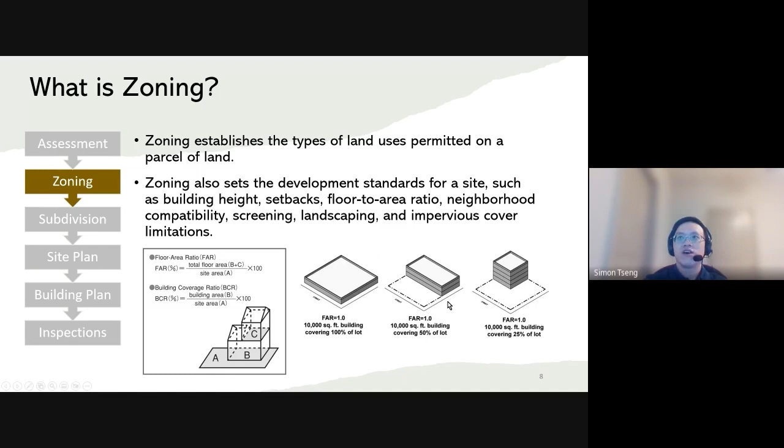So in general, what does zoning do to the city? If you ask a group of people to build something in the same zoning district, you can imagine that they probably will build buildings all in similar shape and similar height, because there are limits there, and all of them want to reach the limits. So everything will look similar. Zoning is a kind of convenient tool for urban planning and design.

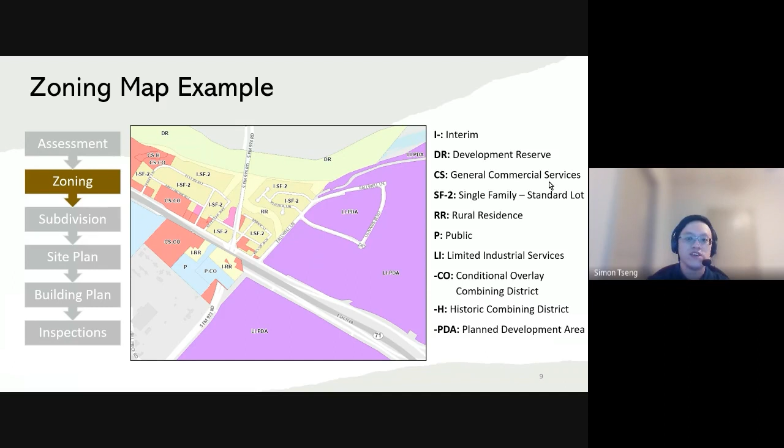So who will get involved if the developer wants to do a zoning or rezoning? Usually the land use commission - they will review your case and tell you if it's okay to revise the current zoning, or if it's okay to add another zoning to the existing one. The developer's team usually includes an urban planner, architect. Sometimes the developer is the city of Austin itself.

And what's the civil engineer's job here? Actually, not much can be done, because this is a high-level thing. Maybe you can do the traffic impact analysis, but not much can be done. And when I say civil engineer here, I mean a civil engineer in a consulting firm like myself.

What is a subdivision? It has three subparts: first is a preliminary plan, second part is plat, third one is subdivision construction plan. By definition, subdivision is the act of dividing land into pieces that are easier to develop.

Preliminary plan is a map or drawing of a plat - I'll show examples later. Here are some regulations telling you that if you want to build a subdivision, you have to follow the rules of building a road, sidewalks, utility lines, storm sewer, drainage ways. So in general, a subdivision development contains infrastructure only - most of the work is in the public right-of-way. I'll show you some examples later.

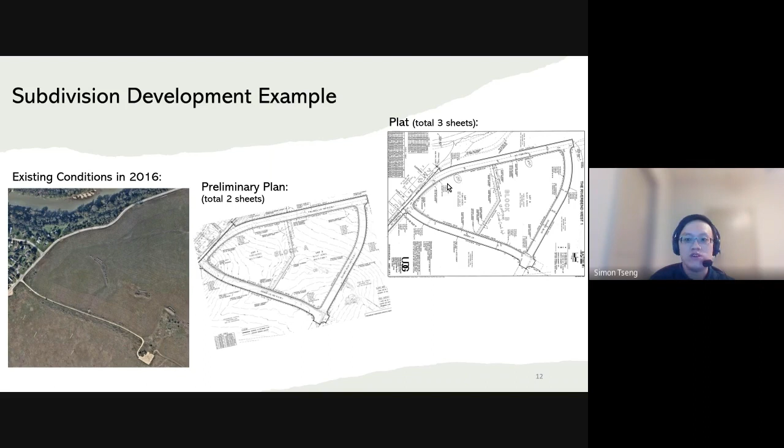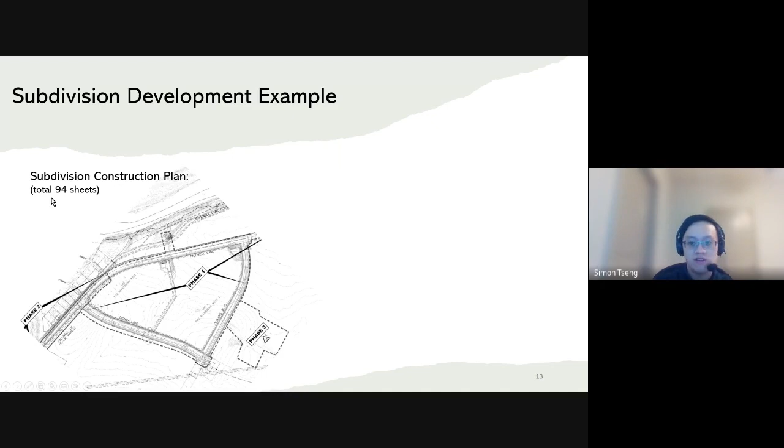In the formal plan for this area, the subdivision construction plan has a total of 94 sheets. These 94 sheets will tell you how to build all the public infrastructure in this area, such as roads, utility, and stormwater detention ponds. Here it is under construction in 2018.

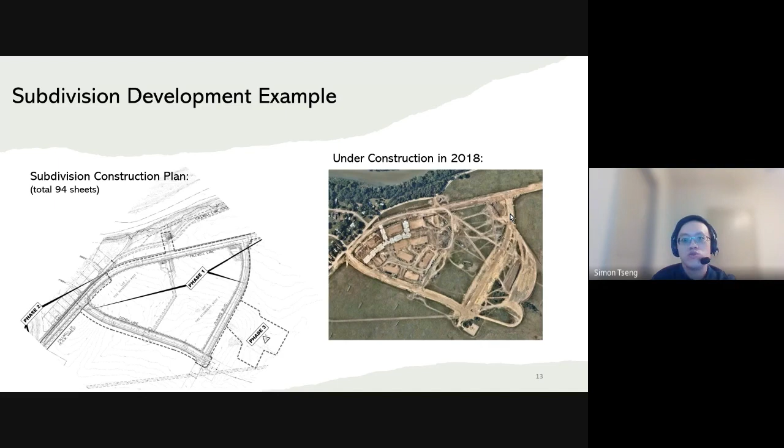Next, let's talk about who will get involved if the developer wants to do a subdivision. There will be reviewers from City of Austin Planning and Development Review, with people from all different backgrounds. Their job is to sit there waiting for your plans, put their comments on plans, and make sure you follow the rules. The developer's team will have a surveyor, urban planner, engineers, and civil engineer doing a lot of things in this stage. I put that in the next slide.

I use this as an example. First of all, if your site is near a creek, you'll have to do a flood plain analysis to make sure everything is outside the flood plain. And you have to do erosion and sedimentation control design to make sure all your construction activities will not impact the environment.

Water and wastewater utility design, and of course geotechnical analysis for all the roads. Here we have ponds, the water quality pond and detention pond design, and sometimes we'll need structural design for the pond walls. Also for the roads, you'll need grading and drainage, and sometimes you'll need sidewalks. Basically, our job is to design most of the public infrastructure for this area.

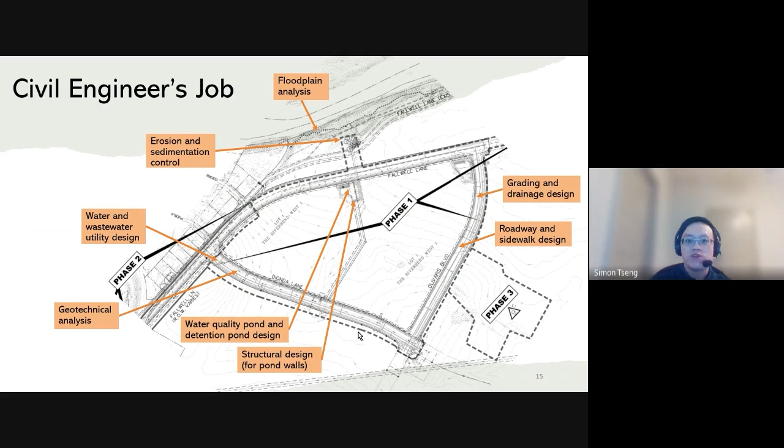Now let's move on to the site plan. This is the definition: it's a plan for a development other than a subdivision construction plan to cover everything. Most of the site plan work is inside the property lines. The work scope includes all infrastructure, but it stops at the buildings. It will only show the general location, function, and shape of buildings. The building's details will be covered by the building plan. So here it's only for the infrastructure, the site plan.

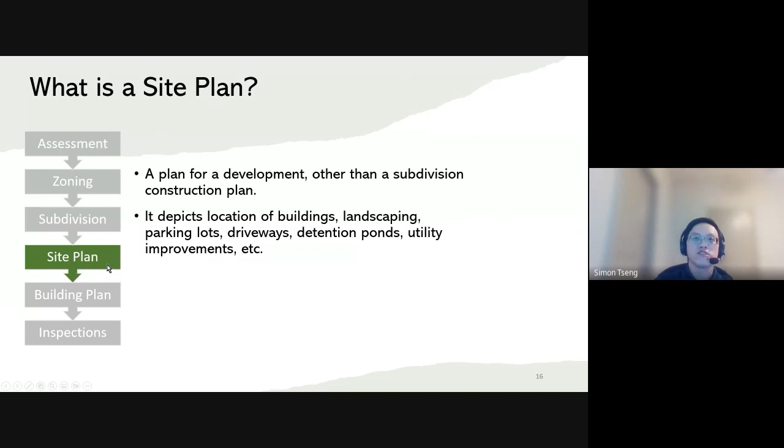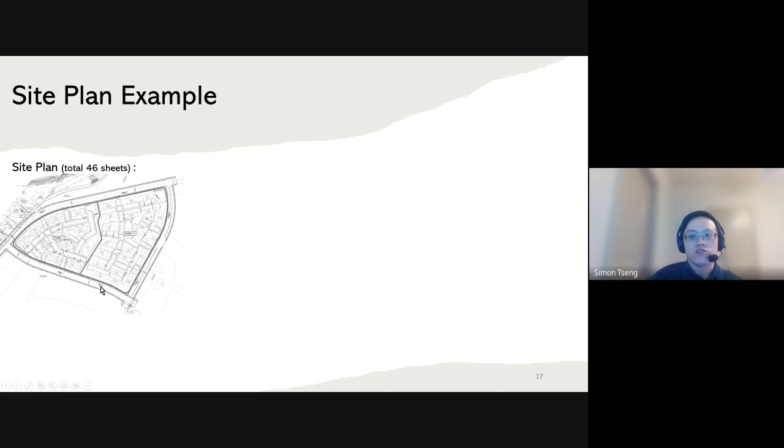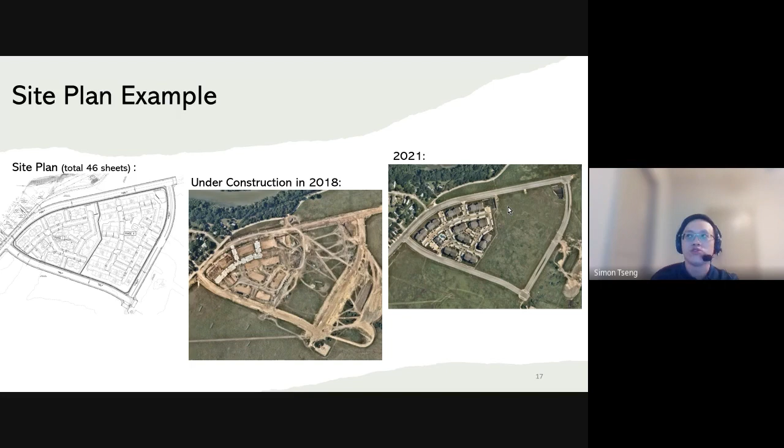So who will get involved if the developer wants to do a site plan? This is the same group of reviewers from City of Austin, but now they will focus on the gray areas between public and private properties. In the developer team, now you will see architect and landscape architect. Their job is to make sure everything is functional, beautiful, and user-friendly—unlike civil engineers like myself, who only focus on functionality.

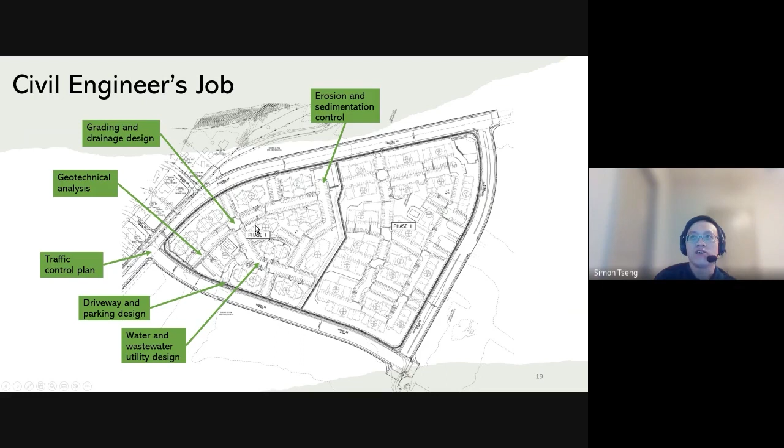The civil engineer's job is similar to subdivision, just inside the property lines. You have to do erosion and sedimentation control, grading and drainage design for the driveways and landscape areas, geotechnical analysis for buildings, and a traffic control plan to show the contractor how to handle existing traffic when construction activities start. There's also parking lot design, and water and wastewater utility design for all the apartment buildings.

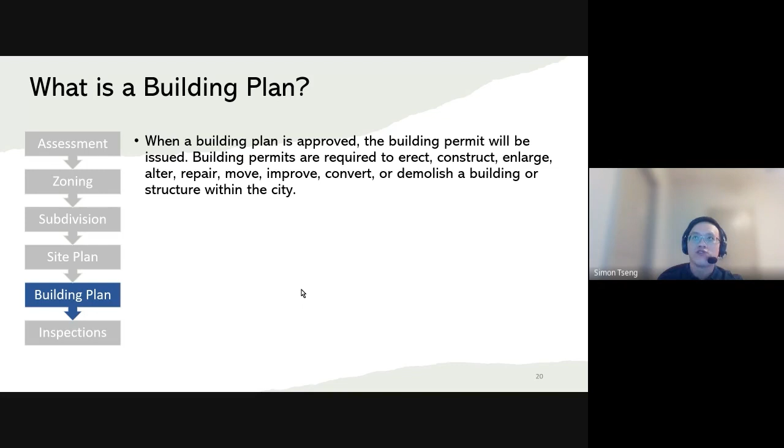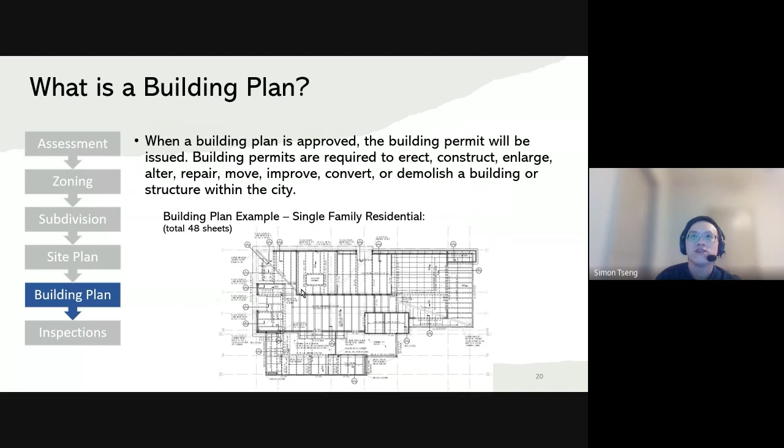Building plans are needed to get building permits. The building permits are required to erect, construct, enlarge, alter, repair, move, improve, convert, or demolish a building or structure within the city. So here's an example of a single-family residential building plan. It has 48 sheets. And who will get involved?

The reviewers are from the city. They are a different group, and they won't focus too much on the private things. They will double check if there are any gray areas between public and private.

In the developer's team, you'll see mostly it is architects and landscape architects' showtime. For civil engineering, usually only the structural engineer can play with them. A civil engineer like myself would not touch the building.

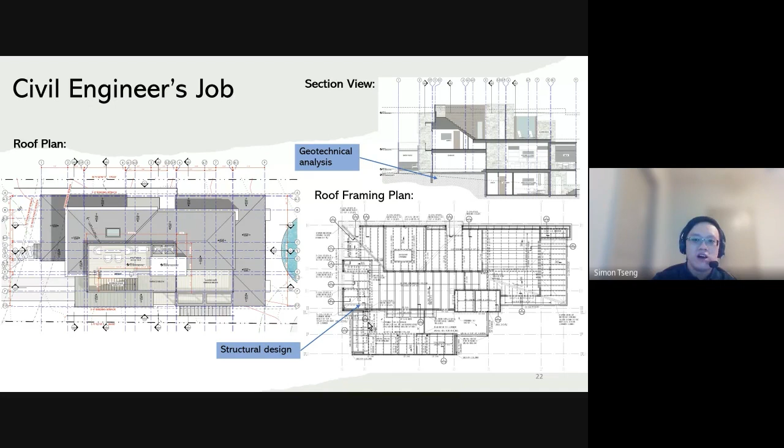In the building plan, you'll see roof plan, framing plan, section views, things like that. Civil engineers can do some geotechnical analysis, structural design, and sometimes a little drainage design for the backyard. But most of the time, a landscape architect can handle it, just a small scope of work.

So like myself, as a civil engineer in a consulting firm, we'll focus on subdivision and site plan, just these two stages. Our job is to produce a plan and get the permits. That's all we want to do.

50% of the time is producing the plan and doing the design analysis, and 50% of the time you are responding to city reviewers' comments, trying to fight with them or dance with them, depending on the condition.

Something about the land development industry: you are dealing with public space most of the time, and especially you are dealing with many gray areas between public and private. Other than that, every site is different. You will have different zonings, different regulations, different reviewers, all leading to different results. And you are always learning different things.

So when you look at a city, it's like reading the hopes, aspirations, and pride of everyone who built it. I think that is part of the land development spirit, and you may be proud of it.